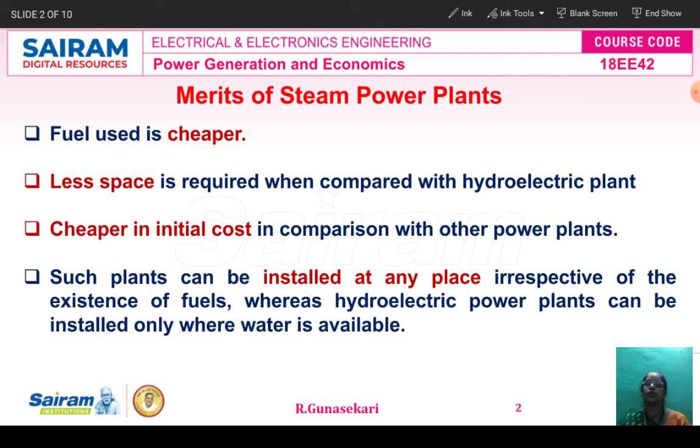The next merit is the steam power plant can be installed at any place because coal is the fuel. But in the hydroelectric power plant, wherever water is available, that place only we have to install the hydro power plant. But for the steam power plant, coal only is used as fuel, so wherever you install the steam power plant, you have to store the coal in the coal storage.

The next merit is these type of power plants, that is steam power plants, can be located near the load center only, to avoid the transmission losses.

Then the production cost of the steam power plant is cheaper compared to the diesel power plant, because in the diesel power plant, diesel is the fuel and a diesel engine is used. So therefore the production cost is high in diesel power plant, less in the steam power plant.

Then suppose the load varies, because the load can vary day by day, that means hour to hour. So therefore if the load changes, it will not affect the steam power plant. So handling the changing load in the steam power plant is very easy only, it's not a difficult one.

Then a portion of the steam raised in the steam power plant can be used as process steam in the industries. The steam power plant produces stable output only. So this is the merits of the steam power plant.

How many merits are there? Totally 9 merits, you have to write down the 9 merits. Under this topic, how the question will come in the VTU exam: list out the merits of the steam power plant. Maximum mark is 6 marks.

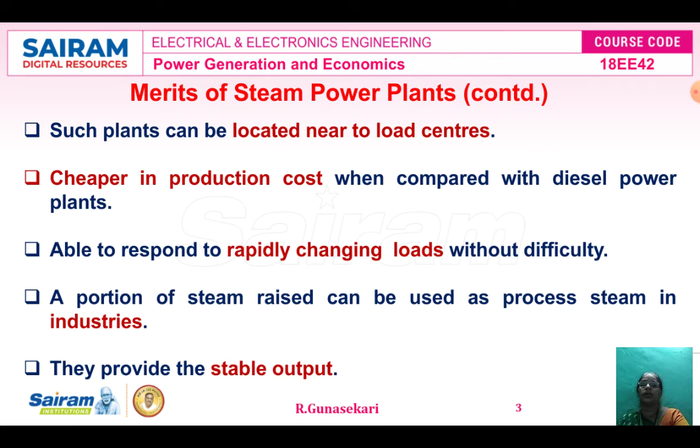Then demerits of the steam power plant. High maintenance cost and operating cost, because in the steam power plant we are using boiler, steam turbine, and generator, which are mechanical devices. So therefore the maintenance cost is more, and the operating cost also more. That means workers' salary and everything comes under operating cost. So maintenance and operating cost is high in the steam power plant.

Then after burning the fuel, ash is also produced, smoke is produced, noise is produced, so therefore air pollution is produced in the steam power plant. So the pollution of atmosphere is due to the fumes and residues from the pulverized fuel of the steam power plant. So this is another disadvantage of the steam power plant.

Then a huge amount of water is required for cooling, because the steam is superheated at a high temperature and high pressure. So the temperature of the steam is very high inside the steam turbine. So therefore a huge amount of water is required.

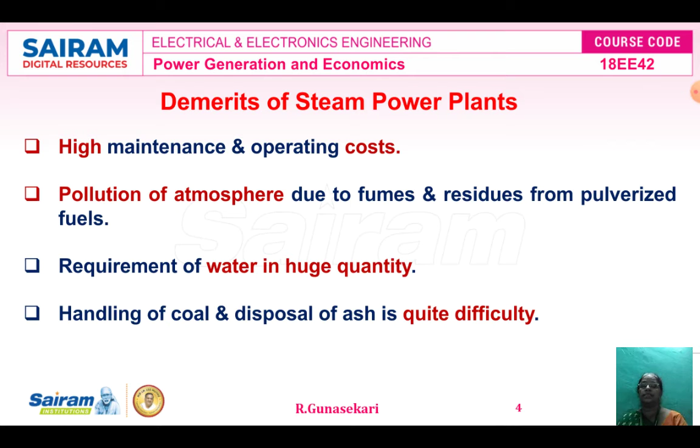Then the handling of coal and the disposal of ash is difficult in the steam power plant. Then we also face trouble from the smoke and heat from the plant.

And then with increase in the operating temperature and pressure, the plant cost increases, and it requires a long time for the erection.

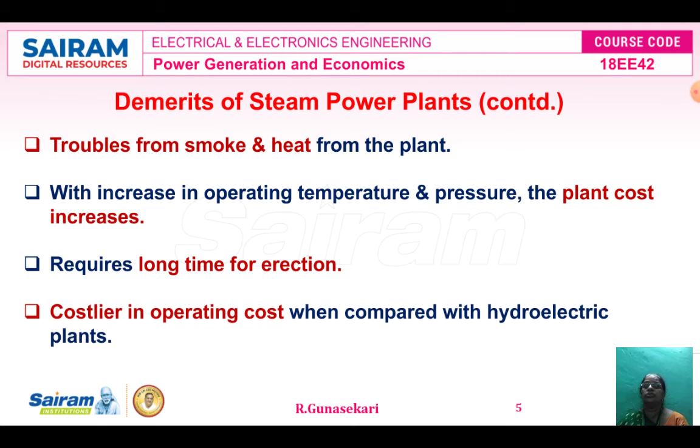Therefore the operating cost of the steam power plant is costlier compared to the hydraulic power plant, that is, the hydroelectric power plant. So these are the demerits of the steam power plant.

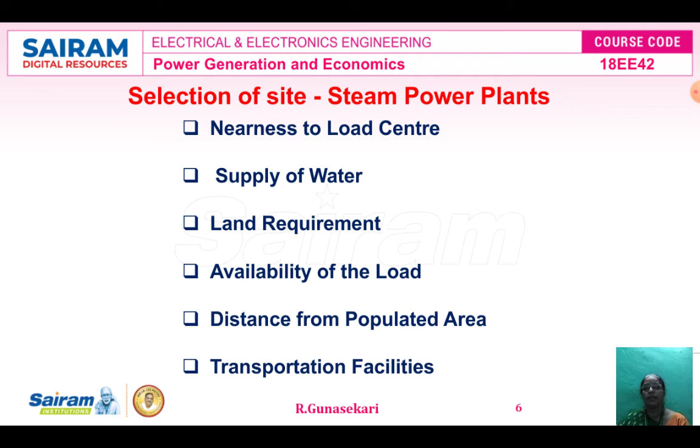Then we studied the selection of site of a steam power plant. Before we install a steam power plant, some factors have to be considered. So what are the factors to be considered for the installation of a steam power plant? Six factors. The first one is nearness to load center, second supply of water, third land requirement, fourth availability of the load, fifth distance from populated area, sixth transportation facilities.

Now we study each factor in detail. First factor, nearness to load center. Why is the steam power plant located near the load center? To avoid the transmission cost and to minimize the transmission losses.

Then the second factor is supply of water. Already I told the disadvantages. A huge amount of water is required for a steam power plant, so therefore we consider this factor. A large amount of water is required. Another thing is that the temperature of the steam going to the turbine and coming out from the boiler is high, so therefore water is required.

And then for cooling the condenser, for cooling purposes, that's why we are using the condenser. And then as a carrying medium for disposal of ash. For these purposes we have to consider the supply of water parameter for the selection of site of a steam power plant.

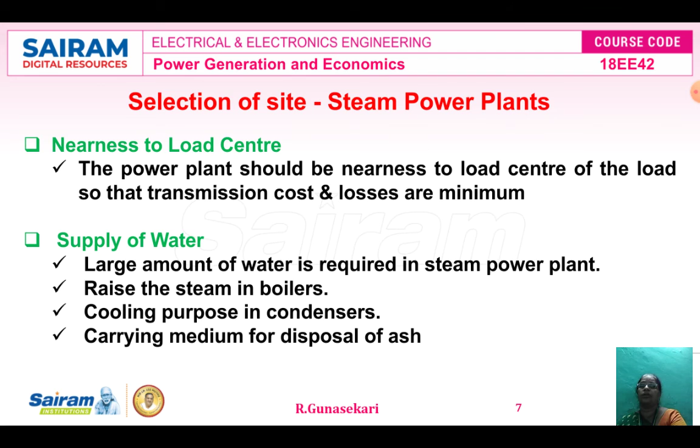The third one is land requirement, because here coal is used as a fuel for the steam power plant. So because of the rate and all, we have to store the coal. Per day, 1000 tons of coal are utilized for producing electricity in the steam power plant. So therefore the coal is stored in the coal storage.

During burning of the coal, ash is also produced, and that should be disposed of. So for this reason, and since we have to purchase the coal at a reasonable rate and then store it, the land requirement factor should be considered.

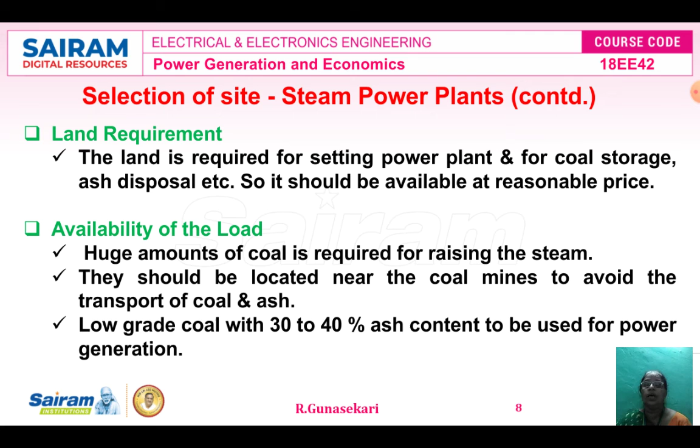The next factor is availability of the load. A huge amount of coal is required for raising the steam produced from the boiler. So therefore the steam power plant is located near the coal mine to avoid the transport of coal and ash. Low grade coal contains 30 to 40% ash. Then this ash content can be used for the power generation.

Then the next factor, distance from populated area. Because there is more noise and air pollution also happens in the steam power plant, the steam power plant is located away from the populated area. And for generating the power we are using pulverized coal. First the coal is unsized, then the unsized coal is converted into pulverized coal.

So therefore fumes, residues, smoke, ash, everything is produced. This is not good for health; this is unhealthy. So therefore the steam power plant is located away from the populated area, and this factor also we have to consider.

Then the final one is transportation facilities. Facilities should be available for the transportation of the heavy equipment and fuels, because thousands of tons of coal per day are utilized for producing electrical energy. And the equipment: the boiler rating is heavy, the turbine rating is heavy, the minimum turbine rating is 1000 megawatts, and the generator is also there. So therefore transportation facilities should be available. So these are the factors to be considered before installation of the steam power plant.